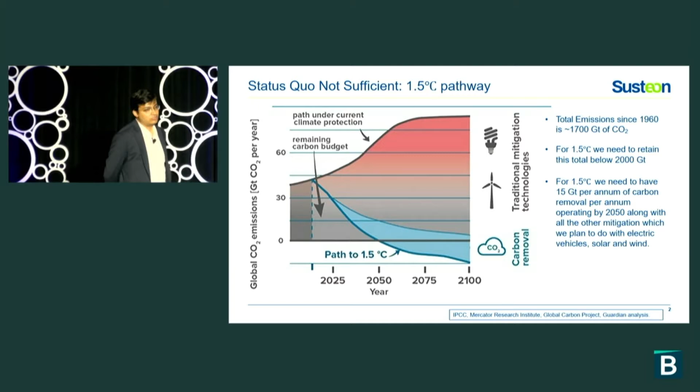So you've seen this chart, all of you, I'm sure, and we talked about it in the morning as well. The 1.5 degrees centigrade pathway is quite difficult, most likely not happening, because we have got the limit of 2,000 gigatons, and we're already at 1,700 and spending at 40 gigatons per annum. So most likely we can't decelerate enough to really hit that. But likely 2 degrees centigrade pathway is possible.

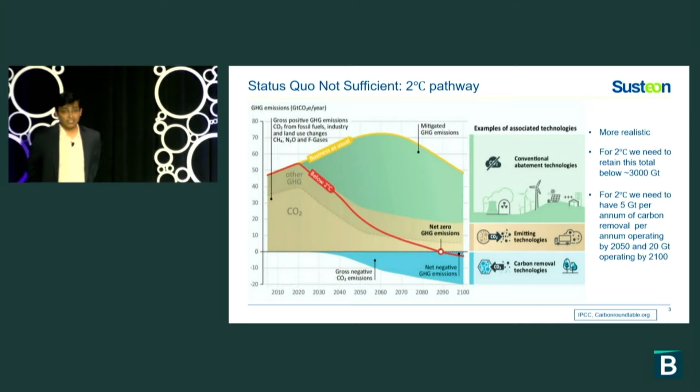It's something which hopefully the new policy framework which comes out of COP26 signs up to, or something which we can aim for. But even 2 degrees centigrade is a gargantuan task. It is extremely difficult, and it could be very simply another case of what has happened to the 1.5 degrees centigrade objective which we had. It'll slip through our hands if we don't follow through very quickly.

So we all know about these. The green region is basically the conventional abatement technologies, which is all these renewable energy pathways, decarbonization of industry, all these things which we need to do for sure. But one thing which you might be seeing is this brown area in this chart, which is essentially talking about emissions which will continue to happen. This is unabated emissions which we will not be able to control. These are hard-to-abate industries, hard-to-abate countries, hard-to-abate geographies which will continue to emit.

And for that, we need a net negative emission technology to offset that. If we don't have that, then we'll never get to net zero. We need to solve for that with net negative technologies. And that's what the blue sector at the bottom is. And that's what I work in, net negative emission technologies. So you'll see that this chart for the blue section as well is quite large.

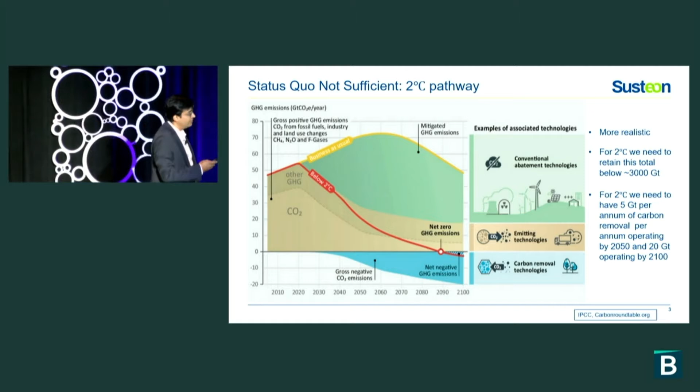And the most conservative estimates talk about 5 gigatons of negative emission by 2050. And 5 gigatons just slips off the tongue, but it's really a very, very large number. And I'll tell you the scale of it and the enormity of what we need to achieve if we have to do that in a few slides. But let's first talk about what are these net negative GHG emission technologies.

Okay. So the potential carbon removal pathways, which we call net negative emission technologies, are either biosphere-based or geosphere-based. And we have heard about some of these in the earlier sessions today. The biosphere-based are available today. They are also scalable today. They're also cheap, $7 to $10 a ton.

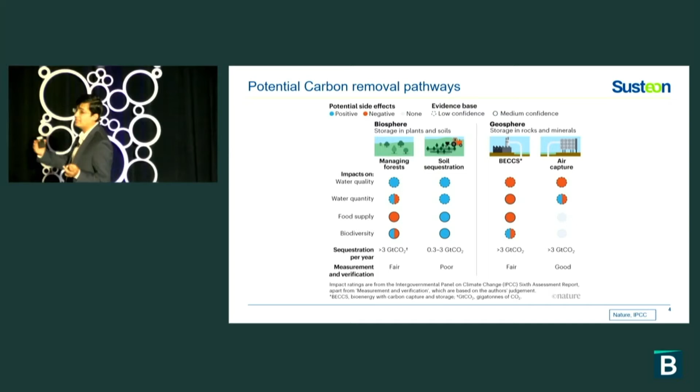But the challenge with them is that the reliability and the longevity is in question, especially because of an increasing population size and increasing climate change. Our ability to control the biosphere-based removal is tenuous. And we cannot just depend on that. We need both, as Marcella was talking about in the morning.

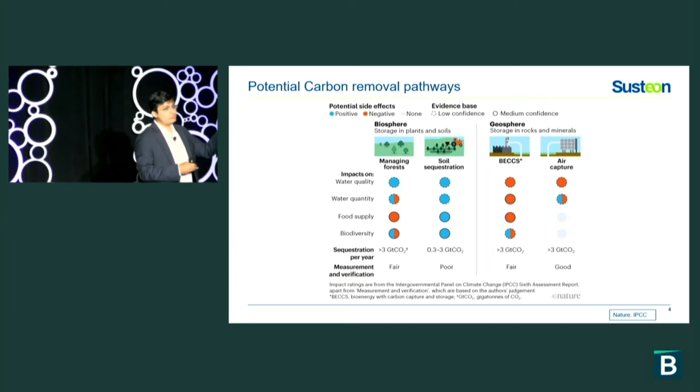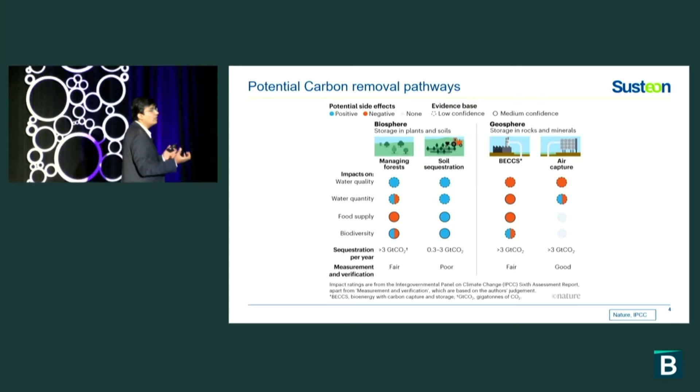So the geosphere-based negative emission technologies are BECCS, which is bioenergy carbon capture and sequestration, and air capture carbon capture and sequestration. Both of these technologies are quite useful, but are quite early in their development cycle. So they need a lot of work to really scale.

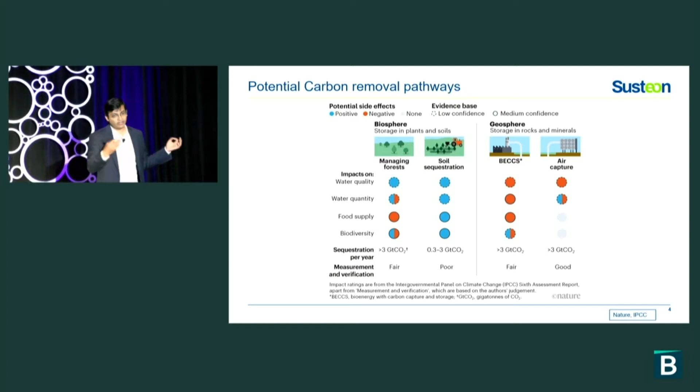We are a believer that air capture can actually, in the longer run, be the right path. Although it is more expensive than BECCS today, it is something which we believe can come at parity and become lower cost than BECCS in the longer run. And it has advantages over BECCS in terms of not competing with food supply or land mass area or biodiversity, those kinds of things. So we believe air capture is the right path to really invest in and work on towards creating the negative emission infrastructure for humankind for the future.

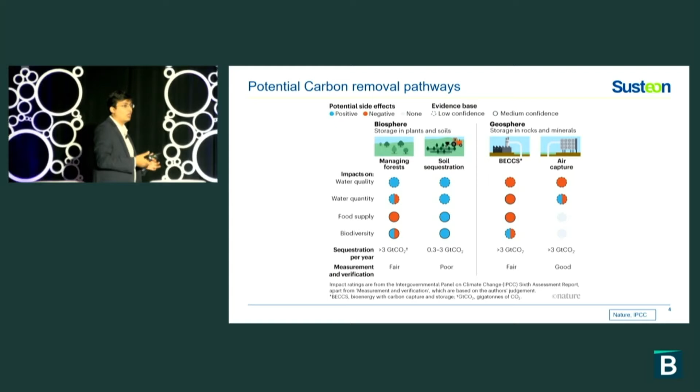But let's come back to the 5 gigaton number. So if you're doing air capture of 5 gigatons per annum in 2050, where do we stand today? Today we are at 10,000 tons per annum, and we're talking about 5 gigatons. That's a 500,000x scale in 30 years. Have we ever done anything like this in any industry before?

Well, if you think about the Model T, when the first one came out, and 30 years later 500,000 cars came out, yes, we have done it. And so yes, the number is scary, but it can be done, and we are really at the Model T of carbon capture today. But that's what needs to happen. Electric vehicles, for example, in the last 10 years have grown by 230x.

So we have the potential to hit this number, and this number will become smaller if we count the 2024, 2025 1 million ton capacity which will come online. So by 2025, we'll have 1 million tons per annum capacity of carbon capture, and then you're only looking at 5,000 times. Still a big number. But what I'm trying to impress upon you is that it is a massive amount of scale which will be required. There is no real way out of this, because this is the sustainable and long-term capture, and it'll also be economical, which I'll tell you how. And there's no reason to run away from it.

We should actually promote it, because although there's a large investment required, probably greater than 300 billion per gigaton of capacity, you're also at the same amount creating a lot of jobs and a lot of work for people who are potentially in industries we want to phase out. These are EPC companies who will have to build these plants. There's 800,000 man-years per gigaton, at least, if not more, required to build a gigaton of capacity of carbon capture. There's thousands, if not millions, of jobs per gigaton of capacity.

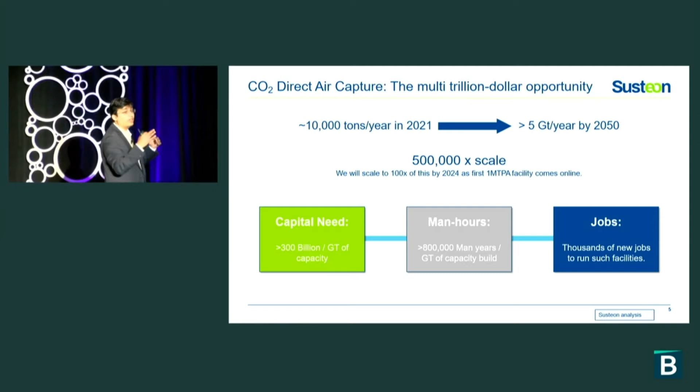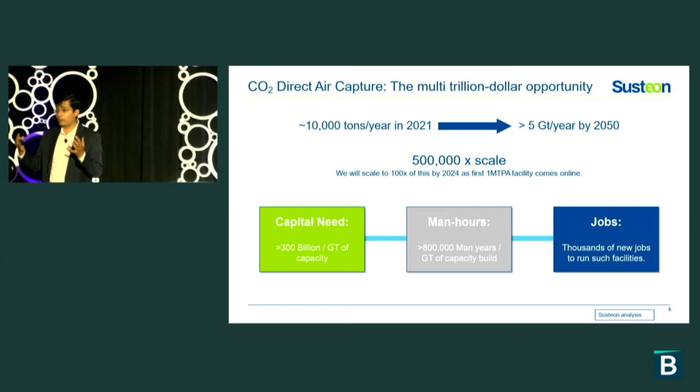And these jobs are of plant operators, of EPC companies, of people who are right now deployed in power plants and oil and gas installations who will need alternative ways of employment to deploy here the skills which they have built in 20, 30 years. And this is great, because the carbon dioxide can also be used as a source material for fuels. So you can completely phase out fossil fuel and become a carbon dioxide economy in the future. This is the multi-trillion-dollar economy of the future, which is going to happen because we need it. There's no way out.

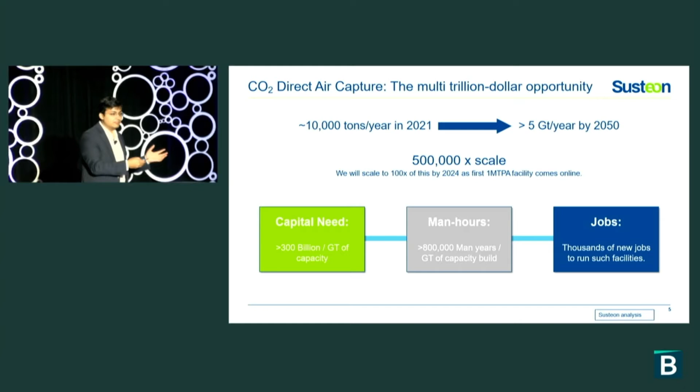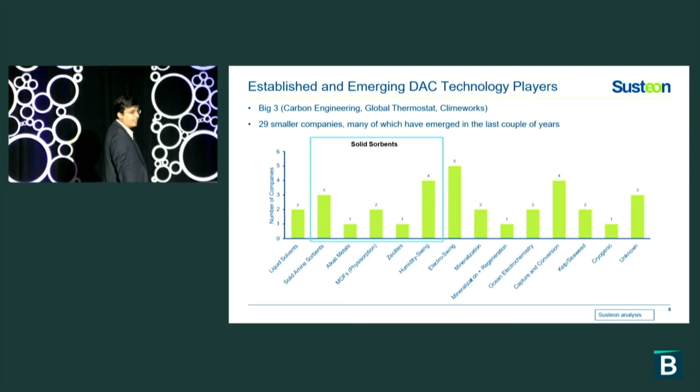Okay, so who's working on it? There's a lot of people working on it. We are one of them. We track about 29 smaller companies and 3 slightly bigger companies in this space. There are lots of different technologies they're working on, and all sorts of angles people are coming at it from, and DOE is doing great work to promote that. Lots of research funds, lots of investment is happening.

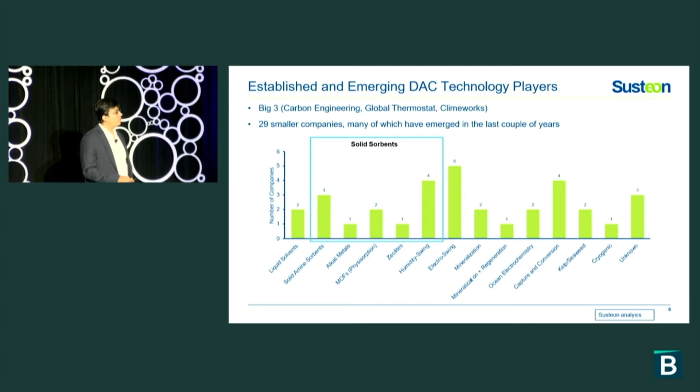We believe solid sorbents is probably the most likely, most effective pathway. Maybe because we're biased, we are also a solid sorbent company. But that's where we see some of these companies developing technologies. And what we have developed in our technology is a true breakthrough in the solid sorbent system, and I'll tell you why. We have a non-amine-based sorbent. Sorbent means the material which captures the carbon, okay?

And that is very important because most of the other competitors or other technologies are amine-based, and amines actually degrade with oxygen. Oxygen is all over in the air. We're trying to capture carbon dioxide; you can't avoid oxygen. So that's one of the challenges which we can avoid with our system. We also have an integrated, very interesting selective heating mechanism, which is very energy efficient. We also have low pressure drop.

All of these end up creating a low capex, low opex system, with a pathway to less than 2,000 kilowatt hours per ton of CO2 in terms of energy, less than $600 per ton a year of capex, and less than $100 per ton of capture cost of CO2, including sequestration.

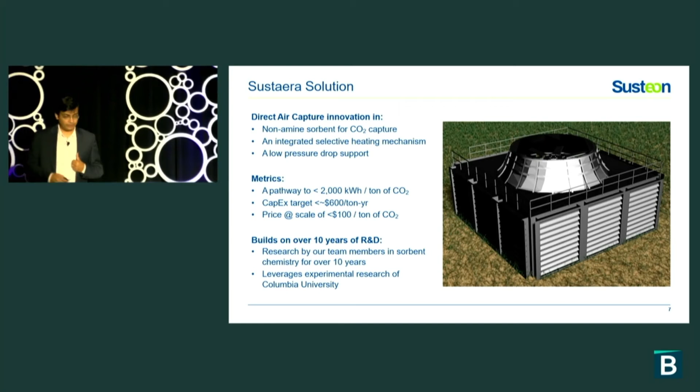And this is built over ten years of R&D, which we have done with our team members who have worked on this technology in the past, and then with Columbia University, who is our experimental partner in this technology. So what's different? We call this DAC 2.0. We have worked with a lot of other current players and come up with this new technology, new way to really work with, because it uses existing supply chains, which is very, very important because we want to scale 5,000 times in the next 30 years. We can't do that by building new supply chains. You have to use existing supply chains because otherwise time will be too long.

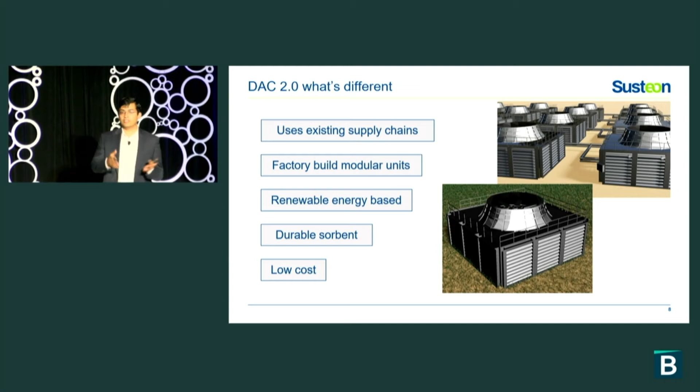We are building a factory-built modular unit, which can be essentially printed and shipped and then installed. You don't need to build it on site. That is the way to scale. You have to think about scale on these things because you're talking about 5 gigaton. We are renewable energy based entirely because you cannot have gas being burned and producing CO2 in parallel to doing carbon capture. That's just not good. Even if you're capturing that CO2, it's not good enough. We need to have completely renewable energy-based systems. Our sorbent is more durable, being non-amine, and most importantly, we have the lowest CapEx and OpEx out there, we believe, which can actually make the economic difference of allowing this to scale.

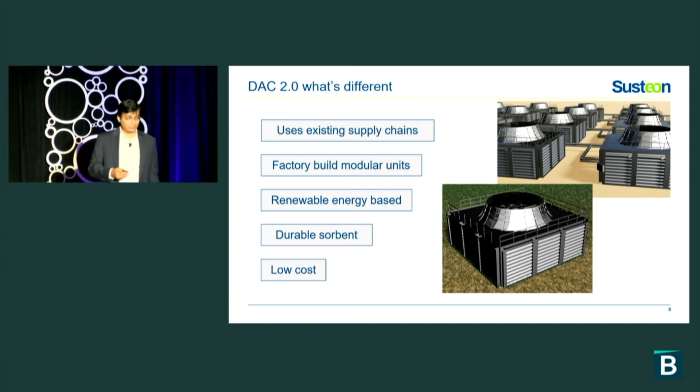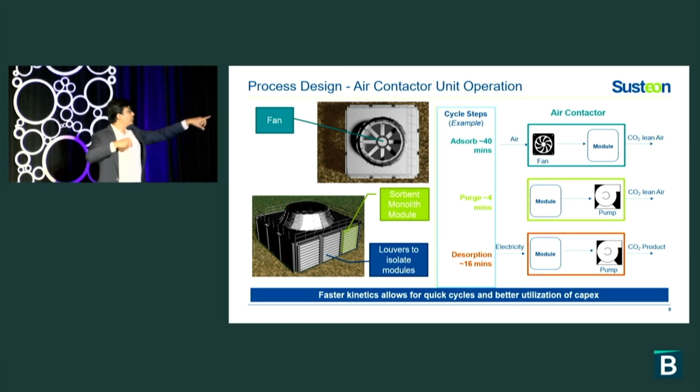The process is, I don't want to go into too much detail about it, but think about a massive cooling tower with these panels you can see on the left, and the air is getting sucked in from the sides and then being pulled up through this big fan at the top. Okay, so one fan is running like a cooling tower, sucking in air from the sides and then capturing that air in those sorbent materials which are in those panels on the side, and then pumping that CO2 down into the earth. That's what these systems would do.

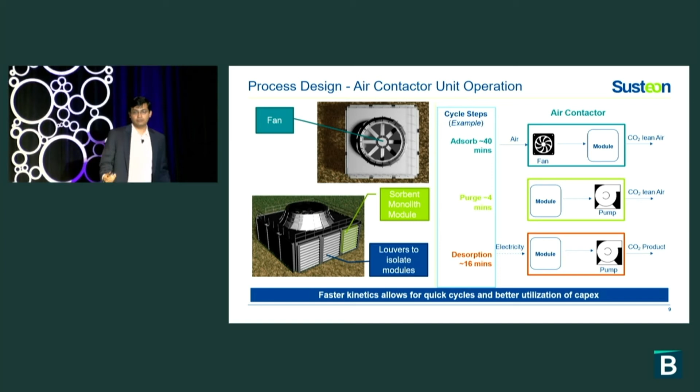Our bench scale unit is already working. We are building our pilot unit next year. All planning and location is already done. We are looking at building in RTP near our office in Raleigh, North Carolina. And then we are hoping to build a large-scale, hundreds of tons per day system in 2023, 2024, which will go live in 2024. And this is what it's going to look like. These are all little cooling towers. You can see this network of cooling towers sitting on land, which are capturing air and then capturing CO2 from it.

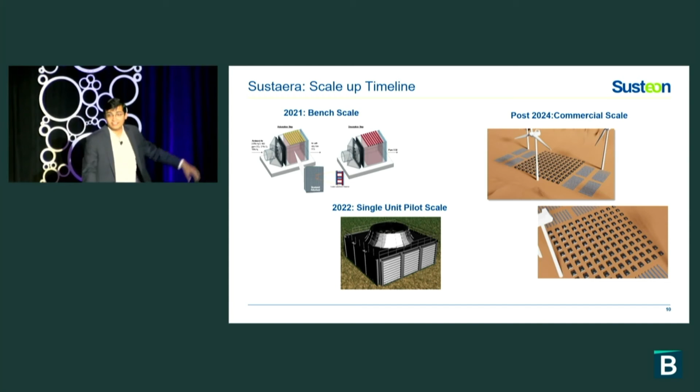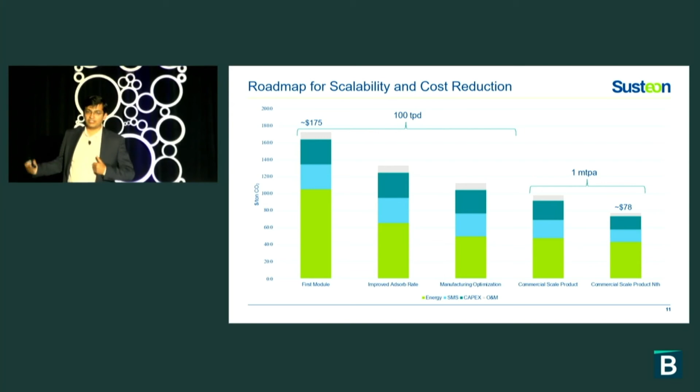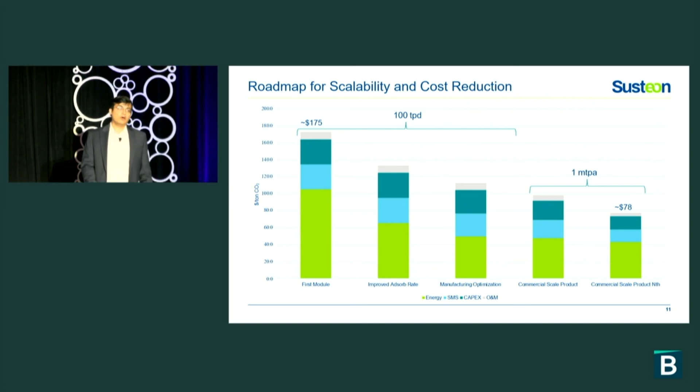The cost curve, as promised, this is the most exciting part. There is not a lot of new science required for this. It's all engineering and scaling cost reduction, which is going to happen. We already believe that our first unit of 100-ton scale is going to be around $175 per ton, and we can get it down to $78 a ton, which is going to compete almost with the cost of some of the point source capture systems. So very excited about that.

We've got a team of scientists and engineers, mostly, some business people, and we've got a lot of partners, especially DOE, who has been very, very generous with their R&D support and their continued support with our technologies. We've got 2 DOE grants directly on this technology working with us.

So I'll leave you with 3 points. First, we cannot work with just traditional energy technologies. We need to have a net negative emission technology strategy, and we need to run after it at scale now. Second, if we do that, we're going to create a $1 trillion business system, which is going to create employment, which is going to create prosperity for our people, and allow translation of skill set with current industries, which are going to slowly phase out. And third, there is a lot of innovation in this happening. We can actually achieve the 5,000x scale, which I'm talking about. And if we just put our mind and investments and policy work towards that, it can be done, but it needs to be done now. Can't wait. Thank you.